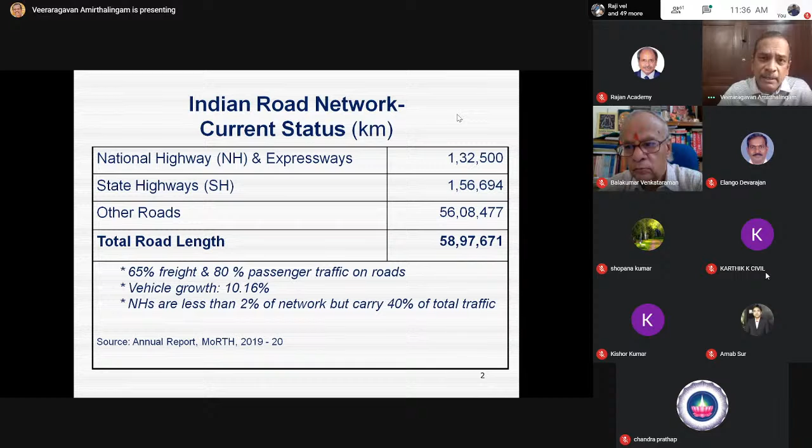The question I am posing before you is that, can I give you a better design which lasts longer? Can I use alternate materials, alternate technologies? Yes, that is possible. I will take you over what are the alternatives that are available for the design as well as rehabilitation of the pavement.

The first challenge that we face in India today is that we don't get aggregates for construction. Perhaps in South India we are fortunate enough. I would not consider Kerala to be very fortunate. There are issues of non-availability of materials for construction because of environmental and other issues. But as far as states like Karnataka, Tamil Nadu, Telangana, Andhra Pradesh, the problem is not that severe.

But if you go north, either to Uttarakhand and beyond, or to Bengal, or to the Northeast, you don't have good quality aggregates. So you don't have the luxury of designing the pavement as you wish.

So when the material is not available, what should I do now? Remember, we are not talking about the initial construction. We are talking about the future maintenance, future rehabilitation.

So should I consider a design which lasts longer with a costly structure, or an alternate design which will last only 10 to 15 years? What should I do now?

Now, if you look at the initial cost and design the pavement, it's quite possible that your vision is only 15 years, 20 years. But the concessional period for any road builder may be 25 years, 30 years. So he has to maintain the road for 30 years.

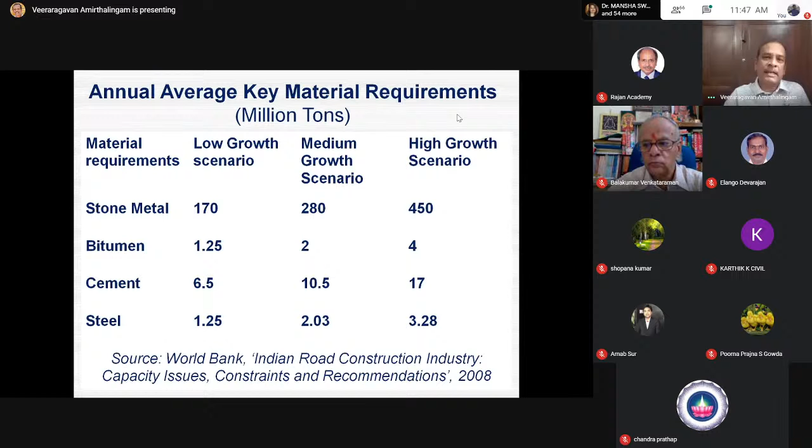So there comes the challenge of alternate designs. If you look at the conventional procedure we adopt to design a pavement, the pavement consists of different layers, starting from an embankment, a subgrade, subbase, base course, and the bituminous layer. So every layer is important, every layer has got a different function. The subgrade is one layer that supports the entire pavement system.

I always tell that there are people who work on bitumen, people who work on bituminous mix, people who work on granular material. So we look at the pavement as a material science. They say that if you test the bitumen, the pavement will perform better, or test a mix and the pavement will perform better. I always tell it is a system.

Even if you put a steel plate on a clayey soil, it will not work. Therefore, testing the bitumen, you say this bitumen is better than that bitumen - I don't question that. But don't tell about the pavement system by testing the material alone.

I always tell those people who do research on bitumen and bituminous mixes - you are not in the applied mechanics department, you are not in the chemistry department, you are not in the chemical engineering department. You are in a civil engineering department. A civil engineer should look at the pavement as a system, pavement as a structure.

We think that structure only means a slab and beams or similar structures, but pavement is also a structure. It has a number of layers, and each layer has a different function. The only thing is we are not worried about cracking on the pavement because the crack is below our feet. But if the crack is at the top, we are worried, because it may fall on our head. That's why we are more careful when it is a structure at the top. But the cost implications of a failure of a road will run to several million crores of rupees every year.

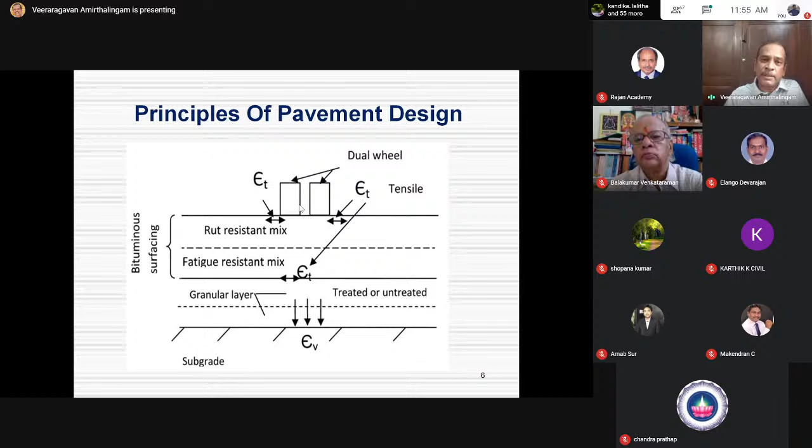What IRC has done is consider these design parameters of radial tensile strain, keeping it within the allowable limit, and the vertical compressive strain on top of subgrade as the allowable limit. They have come out with a design catalog, considering a granular subbase, a granular base, and a bituminous layer, putting only a bituminous layer in one basket.

Just now I told this bituminous layer is not one layer, it is two layers. In fact, it can be three layers: binder course and wearing course. I can say lower binder course, upper binder course. Both are different, gradations are different, binder contents are different. Similarly, the wearing course has a different gradation, different binder content.

So you can have a conventional subgrade, conventional granular subbase, conventional base course, a binder course, and a wearing course. This is option 1 before you.

I can have option 2, an alternate design, with a cement treated subbase here, and a cement treated base here. If I do this, I know pretty well that when I have a cement treated base, this cemented base will crack. At the time of design itself, I should know that this layer will crack.

But if you provide a thin bituminous layer, because I have a stabilized subbase and a stabilized base, the thickness of these layers will be much, much lower than what I have in option 1. So I have now reduced the thickness by stabilizing the subbase and stabilizing the base as well.

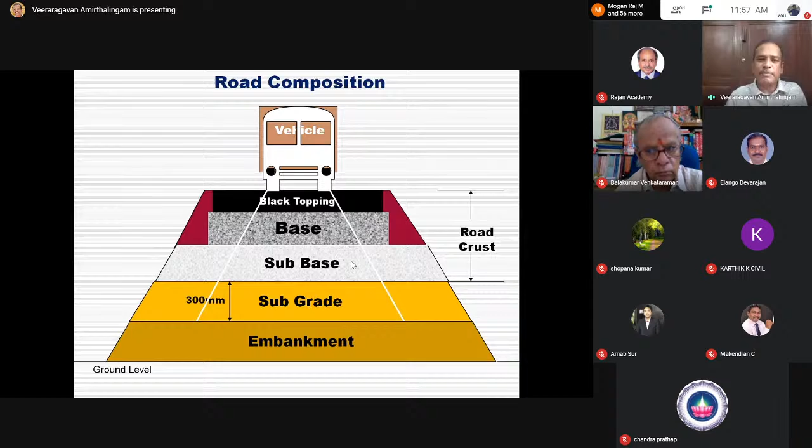Now you can ask me a question. You told about the cement treated subbase. Will it be permeable? Consider both points I said just now: the stresses coming at the bottom layers are much lower, so I don't require a higher percentage or dosage of cement. So when you have less than 2% cement, we found the cement treated subbase is also equally permeable. So that question is addressed.

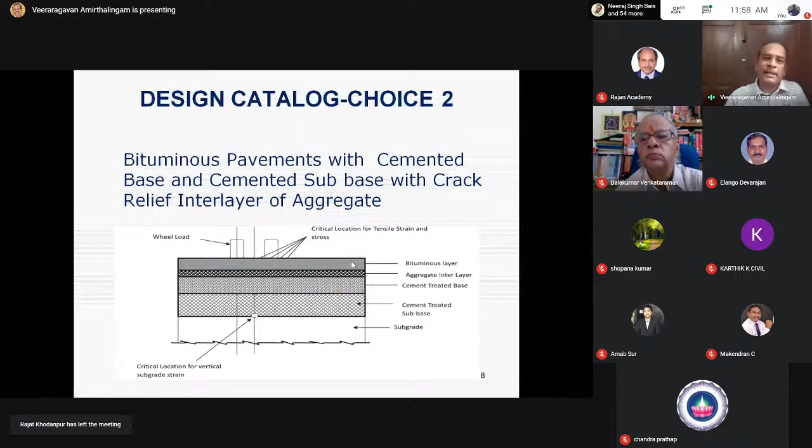Strength is better, with the result the thickness can be brought down. So in the case of structure 3, I have a subgrade, a cement treated subbase, and a cement treated base. In lieu of the granular layer, I go in for a SAMI layer, a stress-absorbing membrane interlayer, which can be a bitumen-impregnated geosynthetic layer.

All are crack retarding layers, I don't say crack prevention layers, crack retarding layers. They will prevent the crack from the cemented base from propagating to the bituminous layer. What will happen is that it's a continuously bonded material. With repeated application of load, there will be tension at the bottom, so a crack will form. If you don't take care, this crack will propagate and come to the top of the bituminous layer.

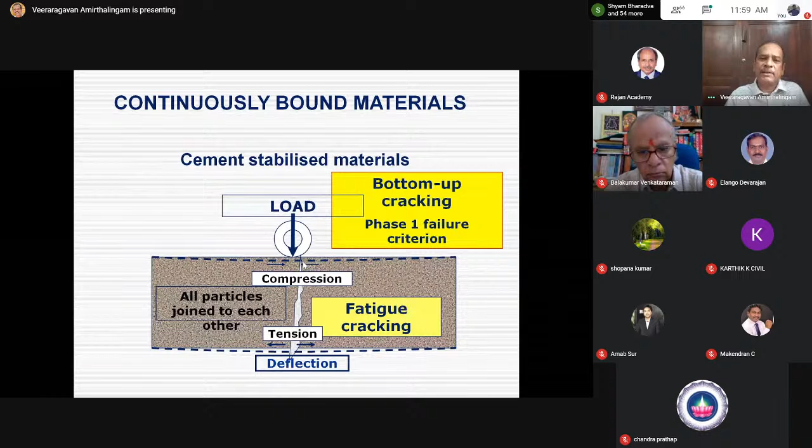But this crack is phase 1. It will become more cracks under repeated loads, that is the effective fatigue phase. Eventually in phase 3, the layer will totally crack, and the modulus of the layer will be equal to a granular layer. Now I have assumed 5000 MPa as a modulus.

It has cracked, it has come to 3000 MPa. It has cracked, it has come to 2000 MPa. It has cracked, it has come to 1000 MPa. Now I designed a pavement assuming 5000 MPa. Is it right? No. Then what modulus should I consider? Should I consider 1000? Maybe that was worthwhile.

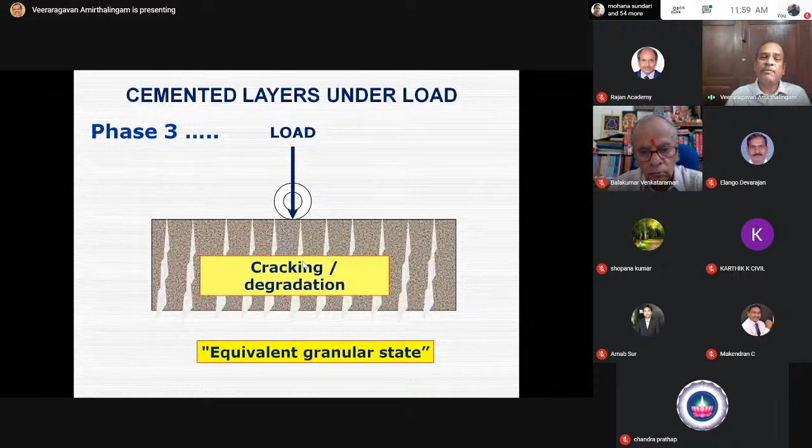So these are issues or research areas on which somebody can work: how do you account for this varying modulus value, and what is its influence on the performance prediction of these pavements? So what South Africa did was recognize that this crack will propagate, so they provided a crushed stone base, which will serve as a cushioning layer between the bituminous layer and the stabilized base.

This will retard the appearance of cracks. It's a crack prevention layer which can be adopted. That is why IRC has come out with a granular layer above a stabilized base. You can also go in for a SAMI layer.

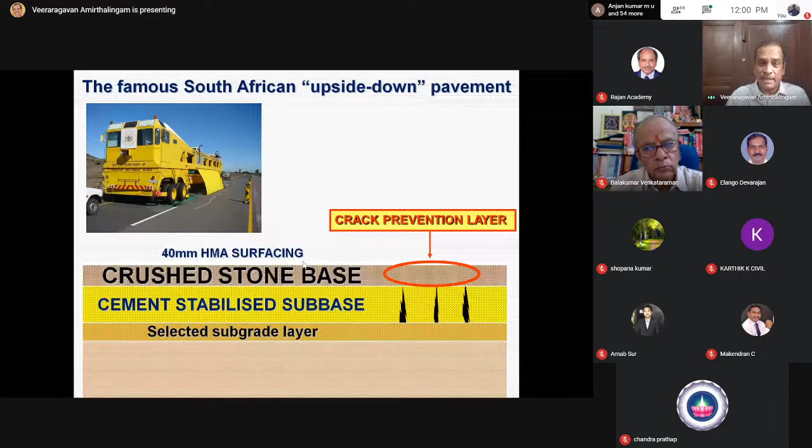They came out with catalog 4, which can be a foamed bitumen emulsion treated with old milled material. For example, you have a 2-lane road, 20 years old, 15 years old. Now I can provide an overlay above that and design it. But what will be the life of that overlay? Will it depend upon the lower layers and their strength? Yes, supposing the lower layer has got few layers of waterbound macadam and does not have a drainage layer.

What is to be done? In such cases, when aggregates are not available, you can mill the entire material, mill the whole bituminous layer. For example, if you look at Anna Salai, the thickness of the bituminous layer will be more than 30 to 40 centimeters. There is no meaning in providing a thicker overlay above that.

I have to resort to recycling. That's called reclaimed asphalt pavement material, called RAP. In some cases, you can mill the old bituminous layer with the old granular base and mix them with foam bitumen. To hot bitumen, you inject air and water. The volume of bitumen will expand maybe 10 to 15 times. It will spot weld the milled particles, and that can be used as a good base course.

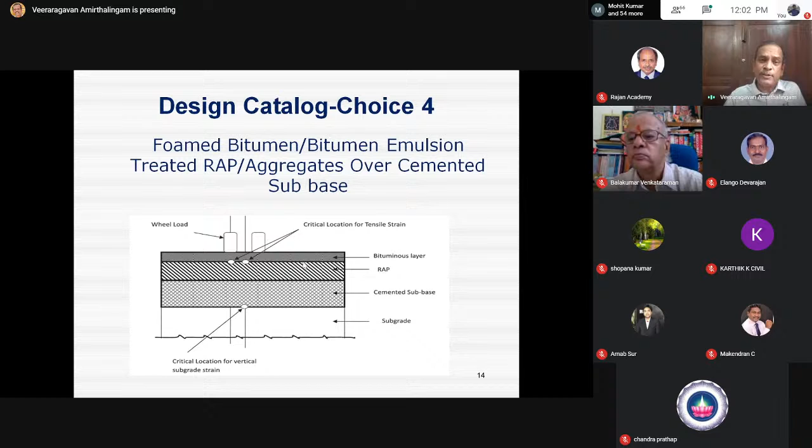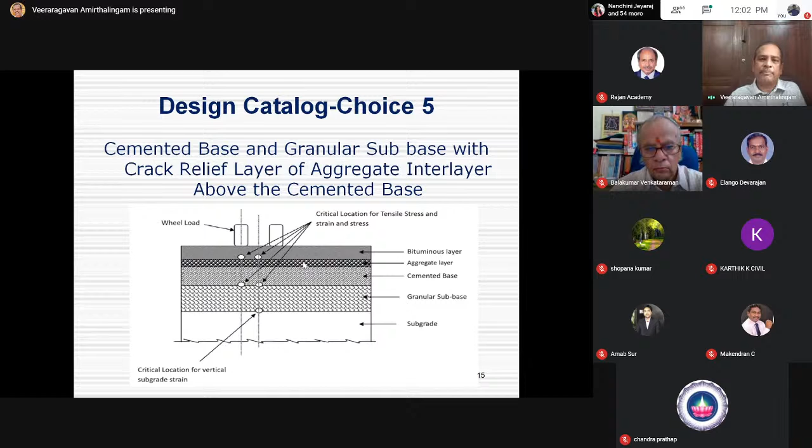So another option, alternate design, is using RAP. Option 5 can be above the cemented base, below that you can have a granular subbase. Instead of having cement treated subbase, you can have a cemented base, an aggregate layer, and a bituminous layer. You can also go in for a choice of a cemented subbase and a wet mix macadam.

So the bottom line is that in pavement design, there is nothing like a single design, nothing like a one-size-fits-all design. You may have to consider soil availability, aggregate availability, machinery availability, capability of the contractor, and then design alternate pavement sections. Then you should be able to predict how each of these will perform and select the one that will have the lowest life cycle cost.

So IRC has given a fatigue model, there are two fatigue models, one for highways with 90% reliability, other for low volume roads with 80% reliability. So they give resilient modulus. This is what I contested at the beginning. These resilient moduli are based on laboratory models, with midpoint gradation, optimum binder content at exactly 35 degrees, tested and then a model derived.

But in the field, pavements are subjected to different loads at different temperatures, different density, different compaction. The performance is different. So this fatigue model may not truly represent the field performance, but still for design purposes, you can use this fatigue model.

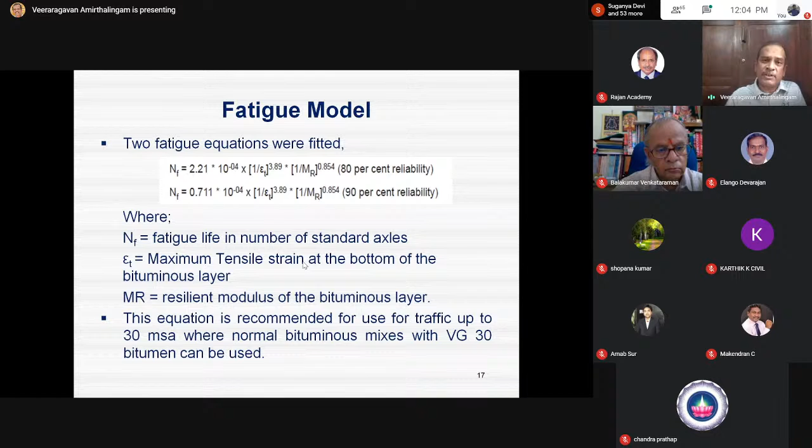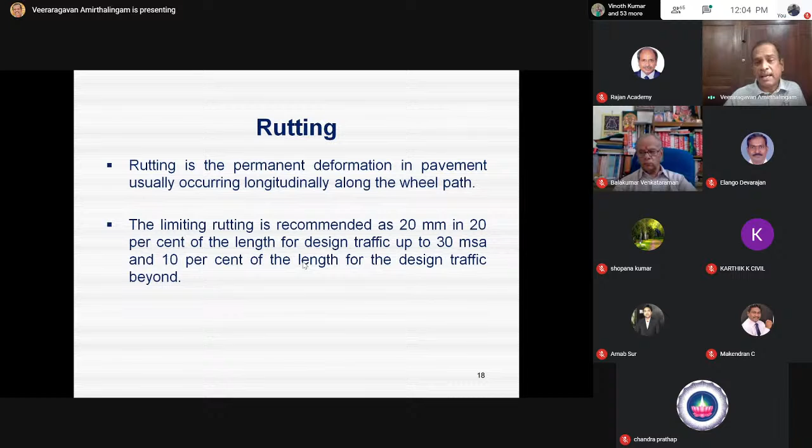Similarly, IRC has come out with a rutting model. It says 20 millimeter as the allowable rutting up to 30 MSA, and 20% of the length of the section can have this much rutting. Again, they have given a rutting model as per IRC 37 2018, with two equations, one with a higher reliability, other with a lower reliability. They consider rutting in this equation.

You can find the number of repetitions is related to the vertical compressive strain on top of the subgrade. It also says rutting in the bituminous layer also occurs due to secondary compaction and shear deformation, apart from that of the subgrade. So you have 20 millimeter rutting - what is the contribution of the bituminous mix, what is the contribution of the subgrade? This is something one has to study. Whoever wants to do research has to separate it out.

But the majority of the rutting that I have observed on Indian highways is due to secondary compaction problems with the bituminous mix. If the gradation is wrong, binder content is wrong, or binder type is wrong, how do you account for it? That is another million dollar question. So if I use a modified binder, will it perform? It may perform, but again we need a different fatigue model.

So there is cracking, there are rutting models. We can go in for cementitious subbase and base courses.

You should know cementitious material normally cracks due to shrinkage, maybe due to temperature changes. So we have to find that the elastic modulus for the design is much, much lower than the respective laboratory values.

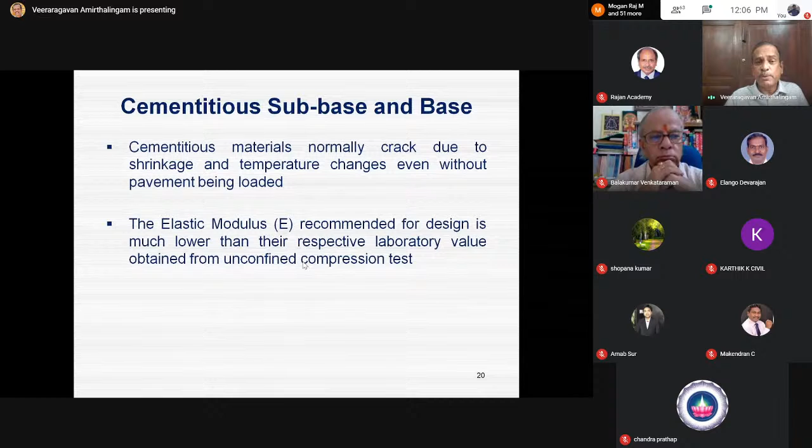So the IRC has again given a fatigue equation. It considers the elastic modulus of cementitious material. It also considers the reliability factor, 1 for expressways, 2 for other highways.

Epsilon T is the tensile strain in the cementitious layer in microstrains, which means you should also know to test a beam of cementitious base in the laboratory to find out at what strain value it fails.

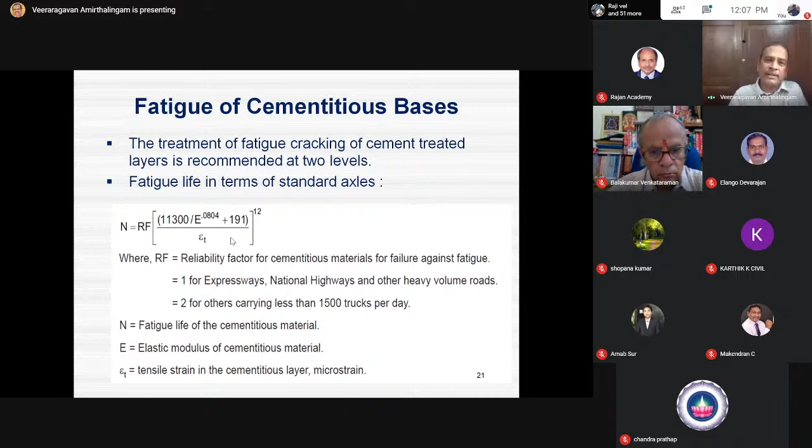But always remember at the back of your mind, field compaction and field density are different from laboratory density. So will I be able to get the same strength? That is a million dollar question. So a performance shift factor between the laboratory predicted value and the field value should always be considered.

They also give a fatigue equation, considering a cumulative fatigue damage analysis, which means you should consider the fatigue life in terms of cumulative number of axle loads. This means, again, I need the spectrum of axle loads.

What percentage of vehicles, trucks are overloaded? More and more the overloading, lesser and lesser will be the life.

So therefore, in the case of a cementitious base, you should consider the cumulative fatigue damage using the equations given by the IRC. You have to consider the fatigue life of the cementitious base and the fatigue life of the bituminous layer when you consider the performance of the pavement.

Now that is one side of the story. For bituminous pavement, there are different alternate designs possible. Now let's jump over to the concrete pavement.

We say concrete pavement. What is the concrete pavement which I am talking about? This concrete pavement can be a jointed cement concrete pavement, a continuously reinforced concrete pavement or CRCP, or a fiber reinforced concrete pavement, FRCP.

It can be a roller compacted concrete pavement. It can also be an interlocking concrete pavement block. Anything is possible, which again means if somebody asks you to design a concrete pavement, you have to ask back the question: what concrete pavement are you talking about?

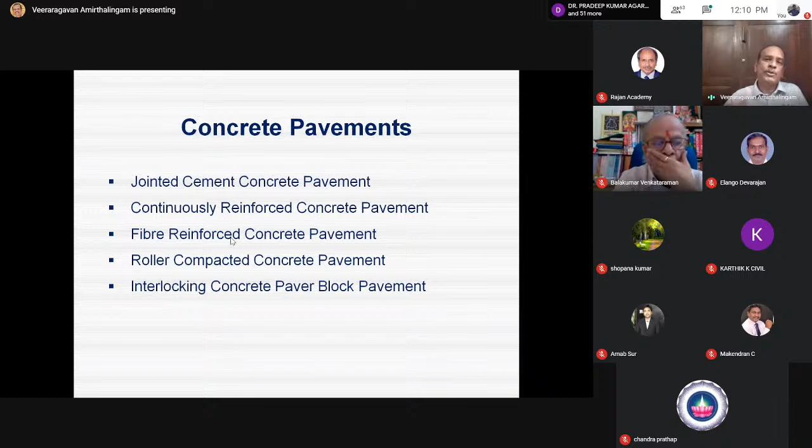There may be issues in constructing a roller compacted concrete pavement for highways, because riding quality will be an issue. But will it be sustainable? Yes, most probably yes. So depending upon the type of highway, category of the road, subgrade soil type, material availability, traffic, climate, and other factors, you have to choose the appropriate type of pavement.

In the case of jointed plain concrete pavement, we have dowel bars, we have tie bars. Normally we have a slab—there's nothing like a fixed rule, but normally one lane of 3.5 meters is one lane. We cut the slabs at maybe 4.2 to 4.5 meters. Wherever you have a contraction joint, we provide a dowel bar. At the end of the day's work, we have a full depth joint.

So assuming that we want a concrete pavement, it will warrant a grade of not less than M40 for highways. Even for rural roads, M30 grade of concrete is required.

And the thickness of the concrete pavement can vary—I forgot, there's also white topping. White topping is concrete over a bituminous pavement, or on a worn bituminous pavement. But in the case of a concrete pavement of M40 for a highway, the thickness requirement will be above 30 centimeters: 300 millimeters, 330, 350, 360.

Can I reduce edge load stresses? Yes, it's possible. How do you reduce them? The edge load stresses cause more distress, or more severe distress. I can go in for a wider shoulder, a concrete shoulder. If I extend the width of the pavement from 3.5 meters by half a meter either side, or one meter either side, then the edge load stresses are reduced, with the result that thickness can be reduced.

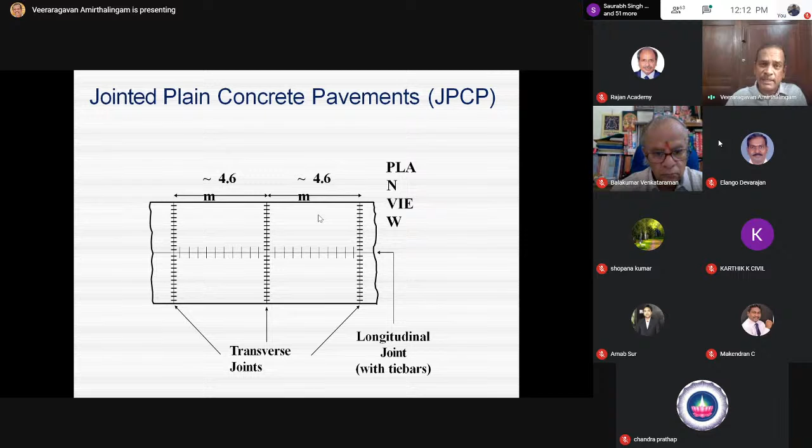We can also go for jointed reinforced concrete pavement, with a skin reinforcement using welded wire fabric, mainly to take care of thermal cracks, nothing more than that. It does not add strength, it adds nothing other than reducing thermal cracks. But generally, we don't go in for this reinforced concrete pavement.

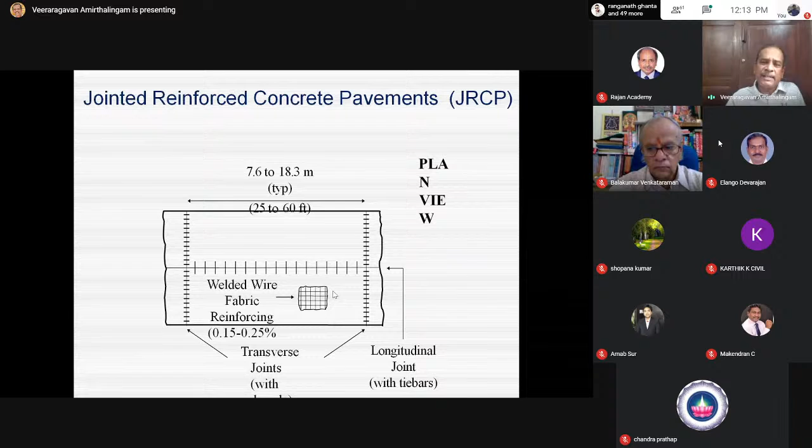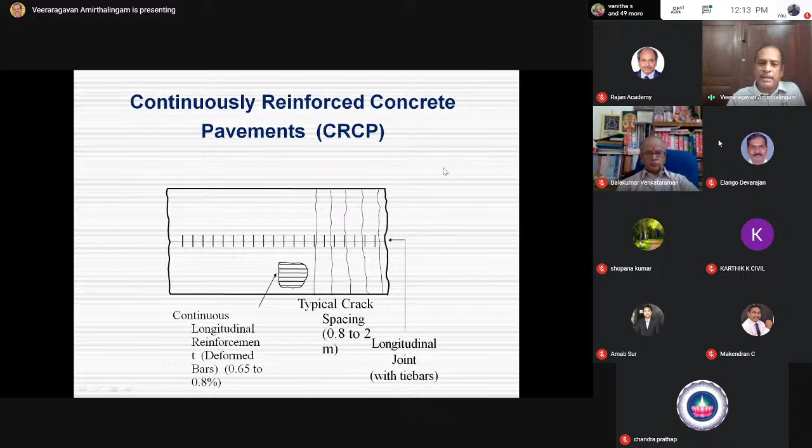JRCP is not commonly done. Either we go for jointed plain concrete pavement, or continuously reinforced concrete pavement. In continuously reinforced concrete pavement, there will be no regular joints, but typical minor hairline cracks may occur at 0.8 to 2 meter intervals. Tie bars are again required. This is how the reinforcement is for a continuously reinforced concrete pavement.

The advantage is no joints. Joints are the bottlenecks, the problematic locations in a concrete pavement. More the joints, more the problems, more noise, more discomfort. If you want a smoother, quieter concrete pavement, go for the CRCP.

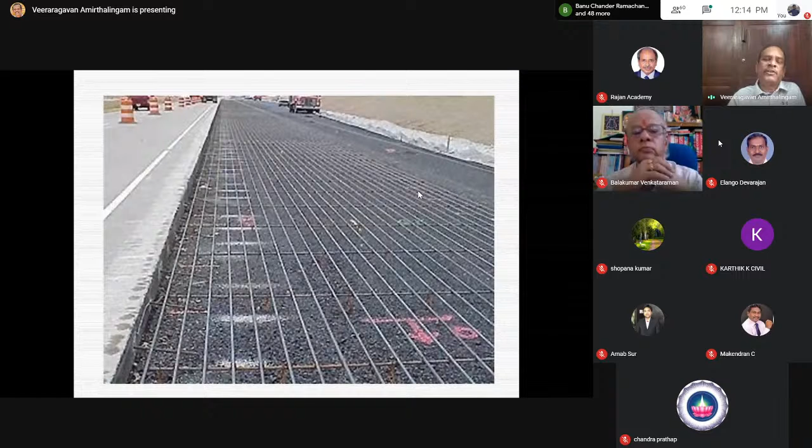But reinforcement is an issue - you have to consider it and design for it. You can definitely guarantee satisfactory performance in jointed reinforced concrete pavement - it's possible. The issue is whether the pavement will last for 30 years. It may or may not.

Why may not be? Because distresses can be material related - cracks mainly related to material durability issues. There can be structural distresses - if you have not provided joints at every 4.2 or 4.5 meters, then the crack will form exactly at that spacing anyway.

These joints should be cut to one-third the depth using diamond cutters between the first and second day. If you delay it, the cracks will form randomly. That's another issue. Third is related to construction and foundation support.

If the foundation is not uniform, there will be settlements. Once the concrete settles, it is very difficult to jack up the slabs, grout them, and put them back in exactly the same profile. So that can be a problem. Concrete, even a steel plate, may not last unless you take care of the supporting layers. So distresses can be material related, structural design related, or support condition related.

In a nutshell, whether it's a bituminous pavement or a concrete pavement, it is a system as a whole. Don't treat mix design as just one component, or structural material as one component, or design as another - they are not independent. You have to marry all of these for the system to perform. Don't test the binder and then predict the performance of the system as a whole. Don't test the mix and then claim to know the performance of the whole system.

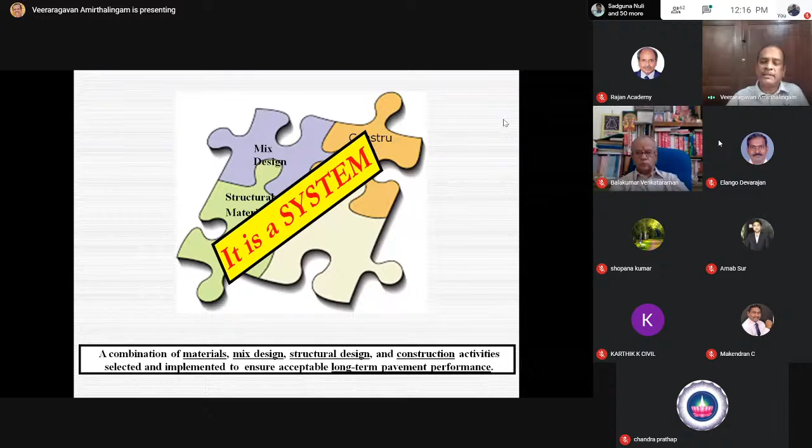I think it's time we also look at precast concrete pavement - something new. I always say tonight there should not be a road, and tomorrow morning there should be a concrete pavement. Is that possible? I think we are moving in this direction - towards precast concrete pavement, which can ensure satisfactory design, good quality control, and curing, and then you bring it to site and assemble it. When we can transport bridge decks, why not transport precast concrete pavements?

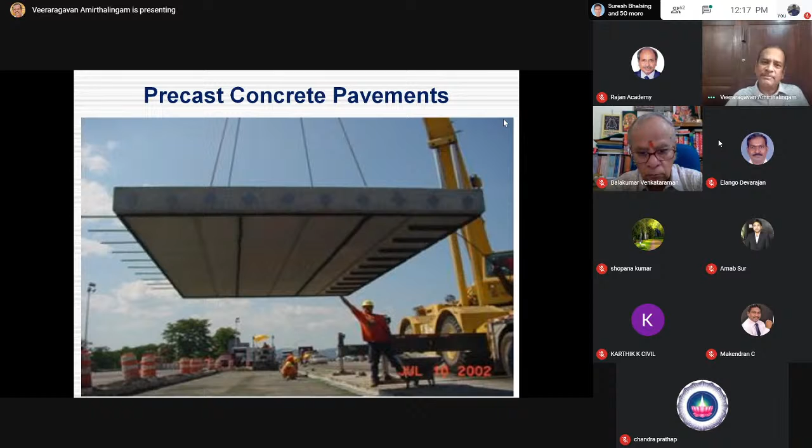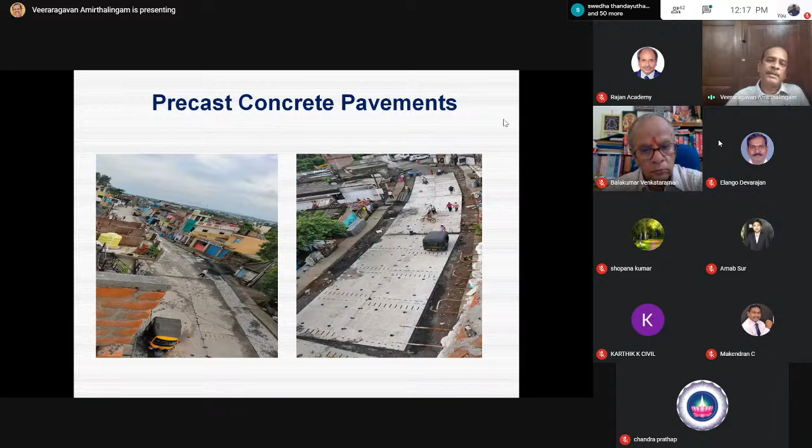The future is alternate design. From the conventional jointed plain cement concrete pavement, we will move over to precast concrete pavement. Alternate pavement types depend on it being bituminous, composite, or concrete. We have to consider alternate rehabilitation techniques, consider life cycle cost, and also consider sustainability issues in construction.

Now projects are being tendered in different formats. Earlier we were doing bill of quantities - the BOQ, bill of quantities, worked out, then we'd tender the project. Then the contractor used to blame the designer - your design is wrong - and we used to blame the contractor - your quality is bad. That was going on earlier. Then we got into the EPC contract: engineering, procurement, and construction, where the contractor can design on his own.

So we got into the design, build, operate, transfer basis - you investigate, you construct, and you operate. So you cannot blame me that my design is wrong. In case of new construction, for all NHAI projects, we have brought in DBOT - design, build, operate, and transfer. On the other hand, we have projects for existing roads where you have to maintain and operate - that is toll, operate, and transfer.

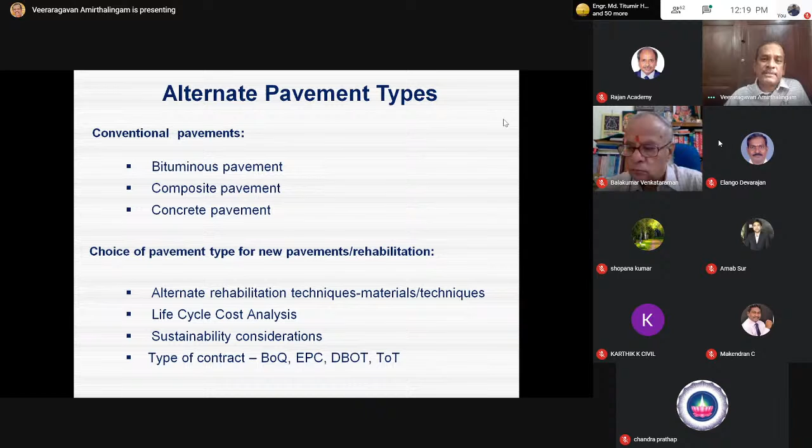Well, an already constructed road is available. You have to maintain and operate it for the next 15 years. So you have to value the road asset, estimate what alternate maintenance treatments are needed, and then design and construct the treatment - salvaging and saving the material, reducing the resources, and then constructing the pavement.

There are possibilities of having a higher modulus compared to conventional gravel. You can go in for a stabilized subbase, and also use modified binders which can withstand higher strains. Is it possible to reduce the strain values? Yes - these pavement design thicknesses will reduce significantly. Will there be a reduction in asphalt layer thickness? Yes. Will it result in pollution reduction? Yes. Will it result in cost saving? Yes. So we should move towards sustainable pavement materials and sustainable design through alternate designs.

You can also recycle materials - you can add up to 30% reclaimed asphalt pavement material, RAP, in a hot mix. You can have up to 50% RAP in cold mix. In the Chennai Tada section, 100% RAP has been used. It is possible to use the entire reclaimed material in pavement design and construction.

So the future of India, and not only India but around the world, is salvaging already constructed pavement, saving material, reducing aggregate consumption, and ensuring satisfactory performance. Even in the case of rural roads, which are often in awfully bad condition, this approach applies.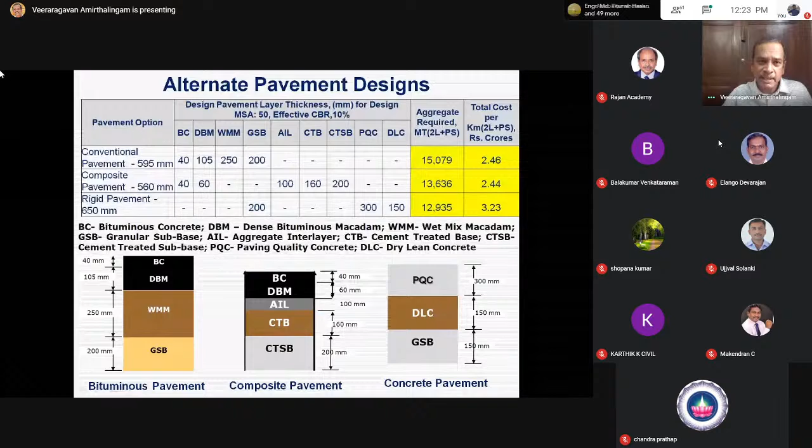If you have money, go for concrete. If you have less money, when you have to choose between conventional design and the composite, I would bet on composite pavement. Exactly this is what we are going to try in Karnataka for the Karnataka Road Development Corporation. I'll come to that issue. But you should consider alternate pavement designs.

Yes, I can further reduce. How do you do that? I will not have this 250 millimeter wet mix macadam, I'll reduce it to 150. How? I can use the geocell. 200 millimeter GSB required? No, I can bring down to 150. So I can further reduce the cost by stabilizing the subgrade using alternate materials. I think the future is on considering alternate materials.

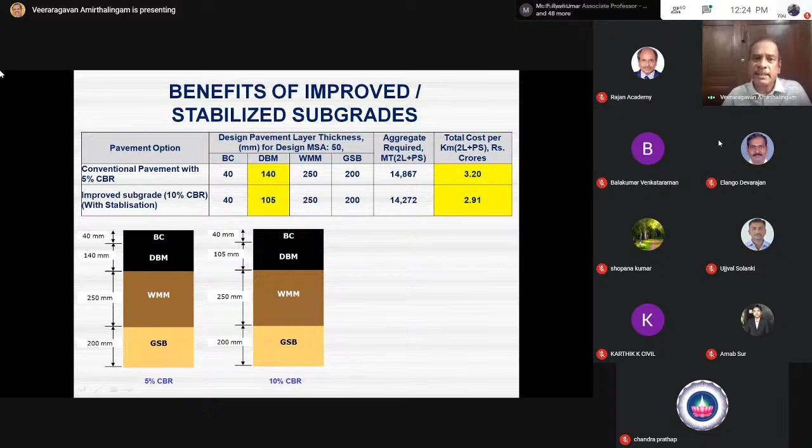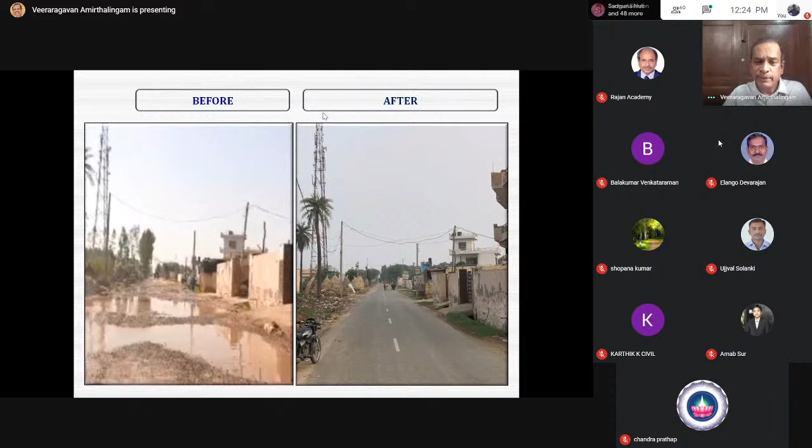This is a photograph of the road before, this is a photograph of the road after. So this road will last for the next 15 years for a rural road without any major maintenance. I think this is something that we should look for. I can use geocells in road pavements for construction. It's an extruded polymeric material like HDPE.

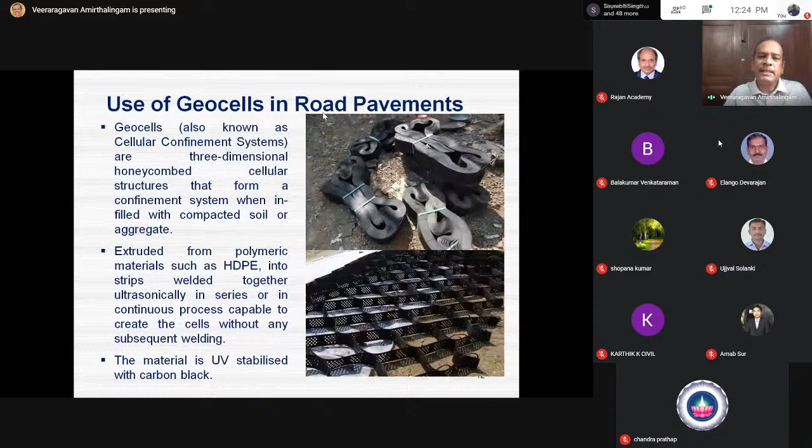This is work that we did at Maharashtra in a Govind dairy. Milk tankers with 12 tons, 12,000 liters will come. So when there are trucks of 10, 12 tons ply, the road was slushy. We suggested go for geocell - stretch the geocells, fill that with aggregates, compact.

What are the advantages? I can use the IRC conventional design, thickness required is 975. I use a geocell only in the subgrade, thickness reduction is possible to 735. Use a geocell in the base, I can reduce thickness to 520. Only the base course 865. So from 975, I can bring the thickness down to 520 by using a geocell. This lasts for 16 years, this lasts for 20 years. If this costs 2,635, this will cost 2,450.

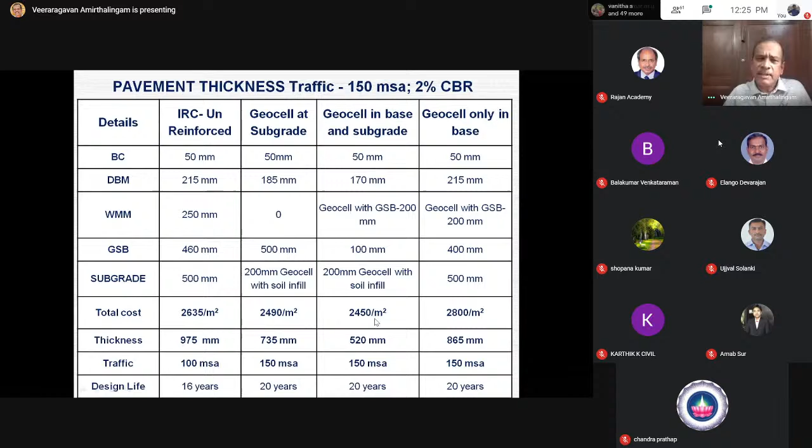Even in case of high CBR, instead of 650 millimeter pavement thickness, I can bring it down from 650 to 340 using a geocell, using it in both the base and subgrade. If this lasts for 14 years, this can last for 20 years. So the future is on use of alternate materials. Instead of stabilization, I can use even a geogrid. I can improve the strength and hence guarantee you the performance.

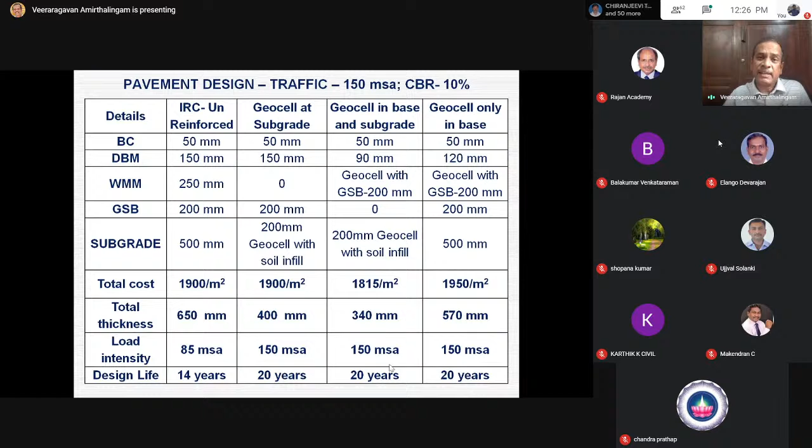Earlier, you can ask me, why were you not adopting all these years? We were not having a code of practice all these years, so we were not adopting. Now, IRC SP 59 is on the use of geotextiles and geosynthetics in highway pavements. You can use that, refer to it, and then design the pavement like this.

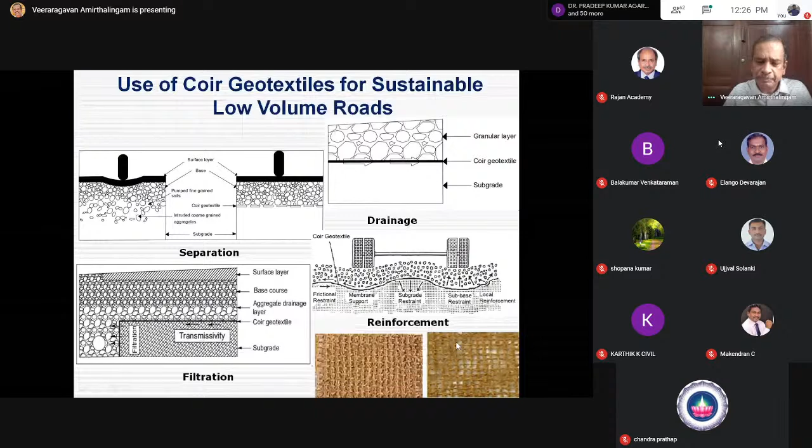Even coir can be used. We tried it for rural roads. Coir has got a function of separation, filtration, drainage, and reinforcement. There are two different types of coir available, different GSMs. For a rural road, we constructed with coir, and we found that if you use 700 GSM or 400 GSM, you can bring down the thicknesses, say from 175 plus 150 to 125 plus 150. So I can bring down the thickness by 50 millimeter here, and from 175 to 150 here. So it is possible to ensure sustainability in low volume roads using coir.

You can also use jute. Other applications are water erosion control using coir - grass will grow. You may ask me a question: will it not be biodegradable? Yes, they are biodegradable.

But we found after 6 to 7 years, they are not that much biodegraded, but they impart the strength in that process, with the result performance is good.

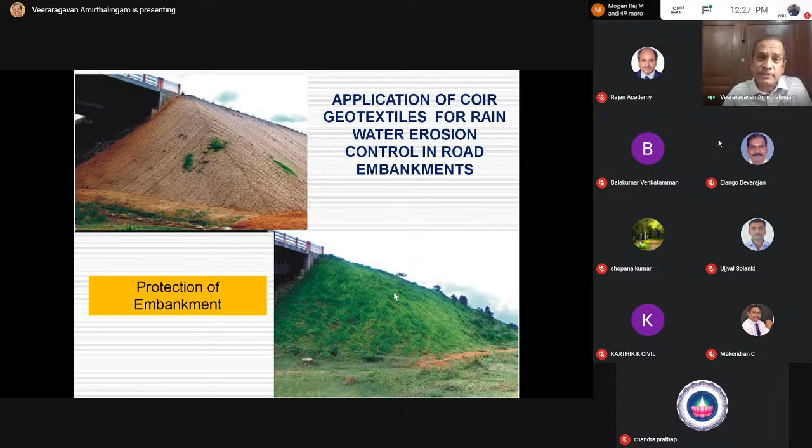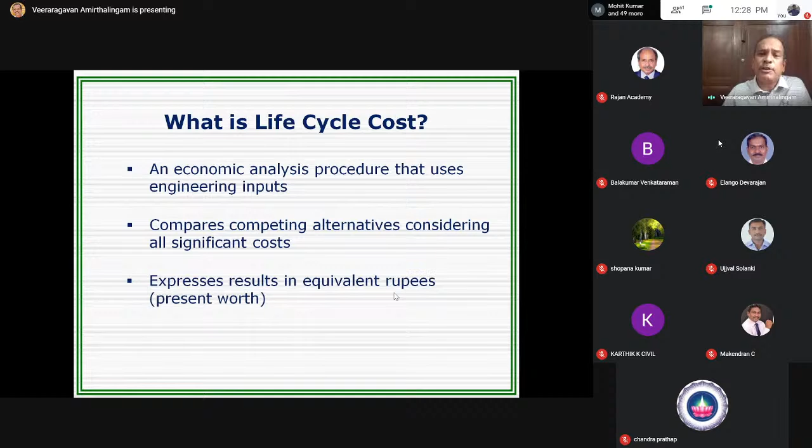Alternate designs - we should consider the alternate designs of life cycle economic analysis procedure. We compare alternate designs for the results in equivalent rupees. So you consider only the initial cost.

The current method of tendering is that if there are 10 bids received from 10 different contractors, whoever quotes lowest, L1, only will get the design, will get the project. But my question at this point is that maybe that another contractor who has quoted 20% more will not be a better design with improved performance?

Yes, that is also possible. But the current contract system does not encourage that. We need to bring in weightages, like green rating of buildings. We have to bring in green rating of highways, alternate technologies which are sustainable.

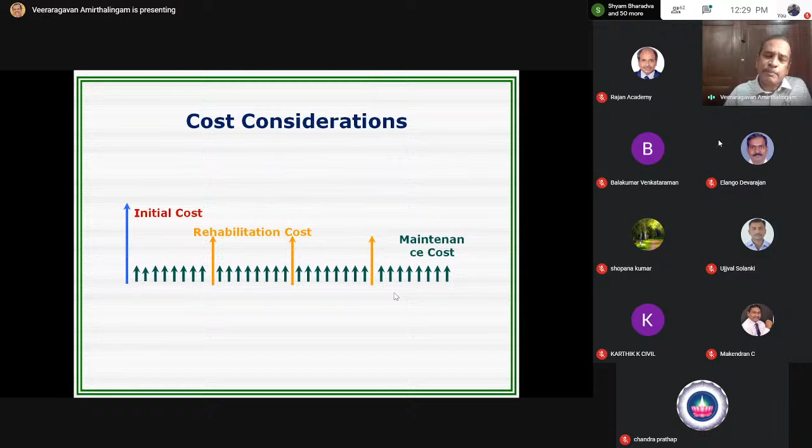But what about the initial construction? The pavement will warrant maintenance every year - that is the routine maintenance. Even though you do routine maintenance, due to wear and tear they require a minor rehabilitation, which can be a thin overlay or a thick overlay, depending upon the deterioration of the pavement.

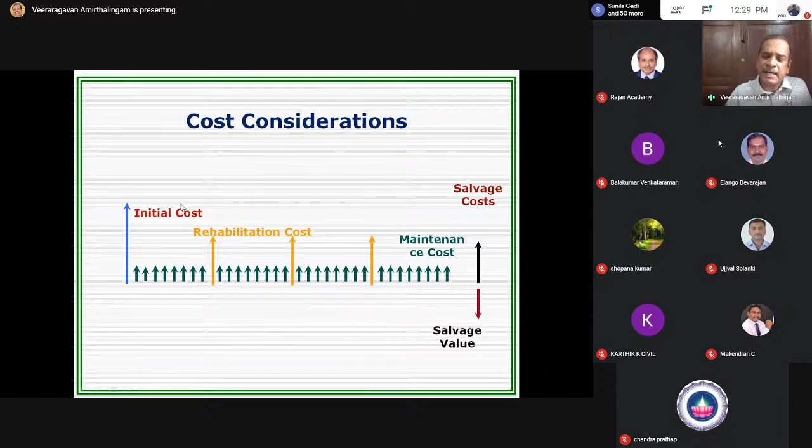There's always a salvage value at the end of the life. If you bring in different pavements of different design, they will perform differently. The year in which they need a rehabilitation treatment will change. So accordingly, you have to bring back the cost to a base year and compare - that is the present worth of cost. For example, you can find that the cost keeps increasing year after year depending upon the design.

I can have design A, which warrants maintenance in the 11th and 22nd year. Design B, which warrants maintenance in the 9th, 18th and 27th year. Design C warrants 8th, 15th, and 23rd. Design D, only one maintenance in the 14th year. Design E, 10th and 21st years. Now I have 5 alternate designs - which is better?

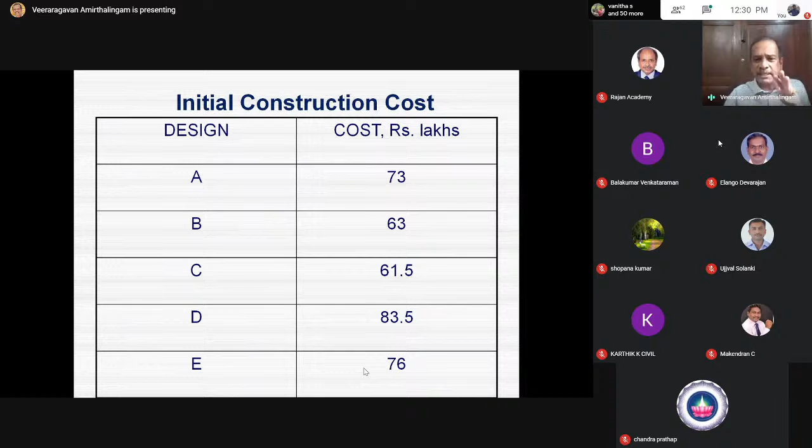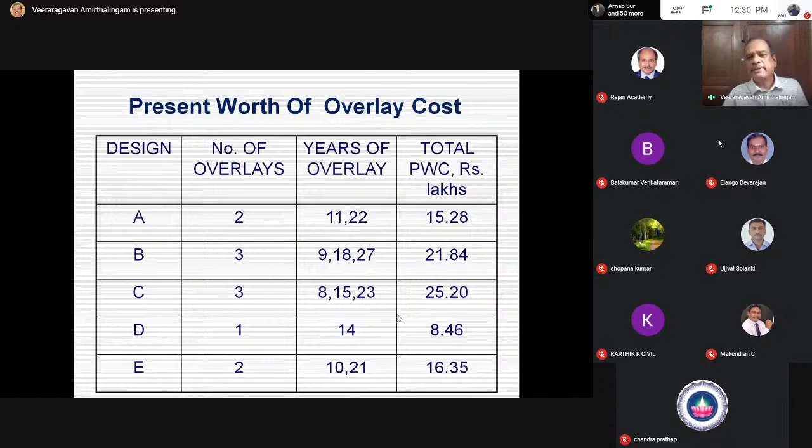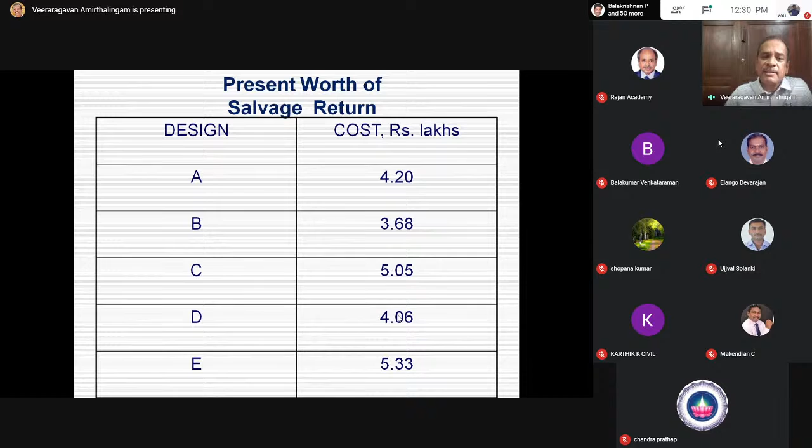This is the extra user cost due to speed reduction because of frequent maintenance. This is the present worth of salvage return. I put all of them in one basket and now compare the 5 alternate designs.

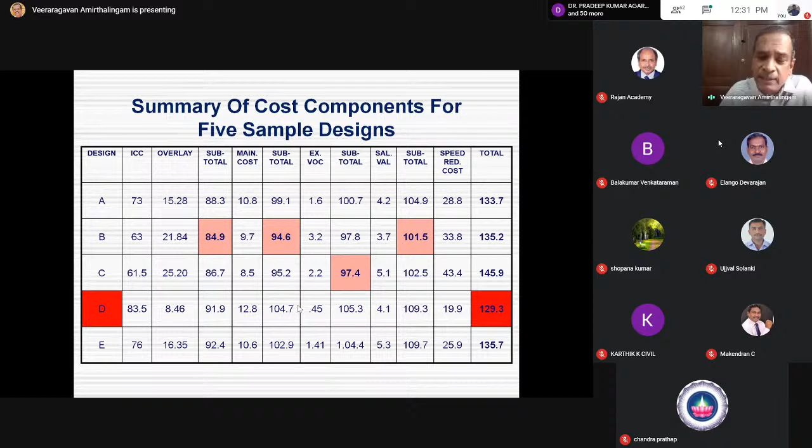You'll be surprised to know - even though the initial cost is more, 63 versus 83 - at the end of the life you'll find that the design which warrants only one maintenance is the sustainable, long-lasting, lowest life cycle cost design. I think this is the future of India, wherein you should consider alternate designs and come out with a cost-effective design.

Similarly, for rehabilitation, a pavement will warrant maintenance at different time periods. For example, maintenance can be preventive or corrective. There are different choices of treatment - fog seal, slurry seal, microsurfacing - as preventive maintenance, which can be done when the pavement is in good condition.

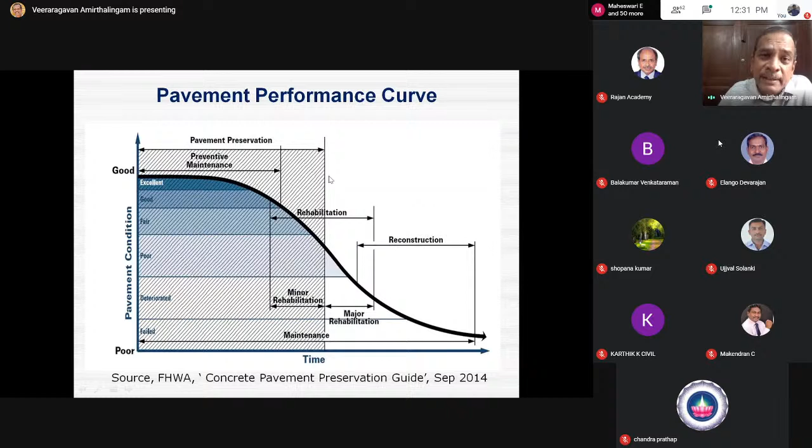If I do it here, the performance is better, like a new pavement. Why are you not doing that? This is something we need to develop - the concept of preventive maintenance with different alternatives.

Alternate binders are available, different mixes are available. Recycling, again, can be cold or hot, in situ or central plant. So alternate rehabilitation treatments are possible here.

For example, this is an existing cracked pavement. I can provide an overlay above with 140 millimeter dense bituminous macadam and bituminous concrete. Alternatively, I can mill the material - as I said, within Chennai-Tada, this is a bitumen stabilized material - so I use this material here and then provide BC.

You'll find that the cost per kilometer is 116 lakhs versus only 95 lakhs. Aggregate consumption is 3,400 tons per kilometer versus only 1,180 tons per kilometer. So an alternate design with recycling, reusing the material and rehabilitating it, will be much better than providing an overlay over an existing deteriorated road.

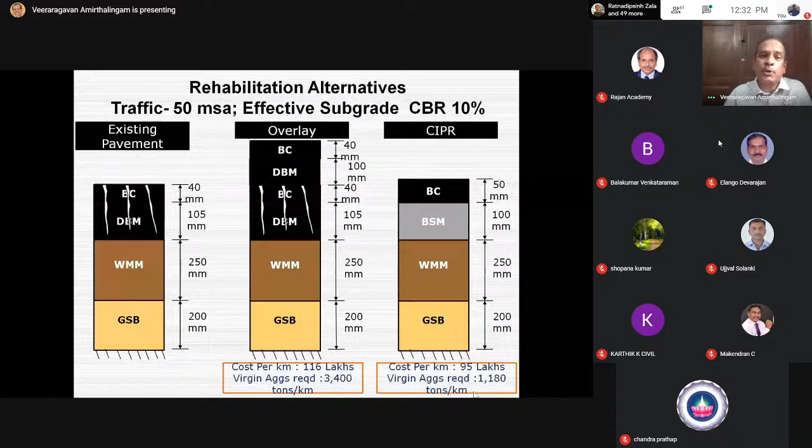A simple case of a conventional design with a cement treated subbase (CTSB) - you'll find that around 3,000 metric tons or 2,500 metric tons of aggregate can be saved by providing a cement treated subbase, also using reclaimed asphalt pavement materials.

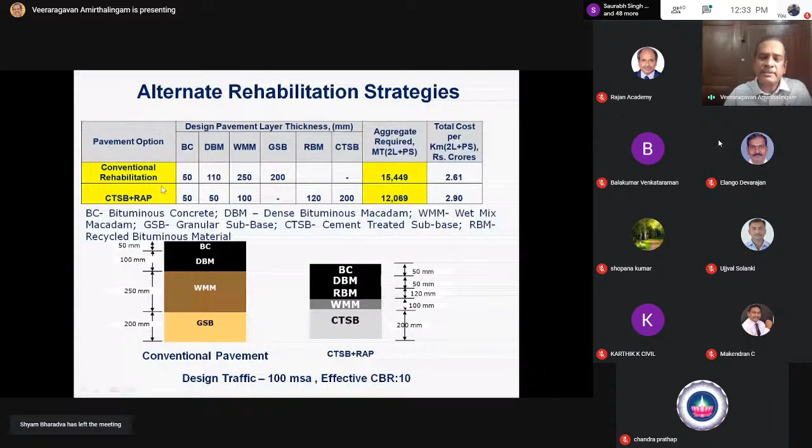So the future is on reduce, reuse, and recycle. That is the mantra. If you consider the cost economics of cement treated subbase material, we found that we can save nearly 60 lakh rupees for a 4-lane highway by introducing a cement treated subbase.

So in this case, for example, this is a road which has to be rehabilitated. What should I do now? You have got different options. This pavement has already cracked, as you are seeing here.

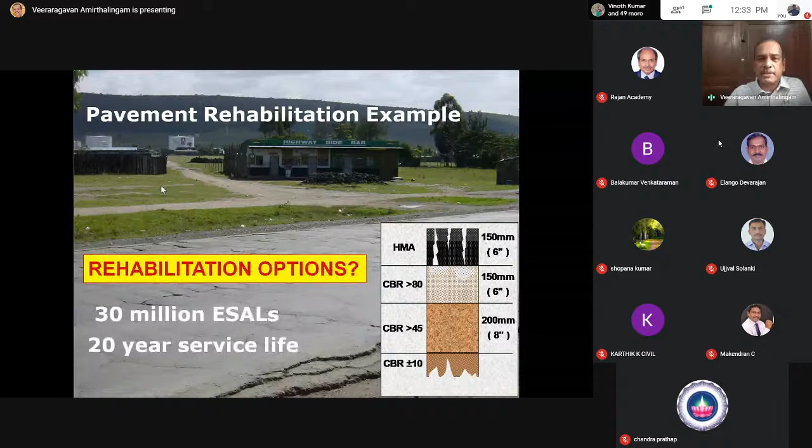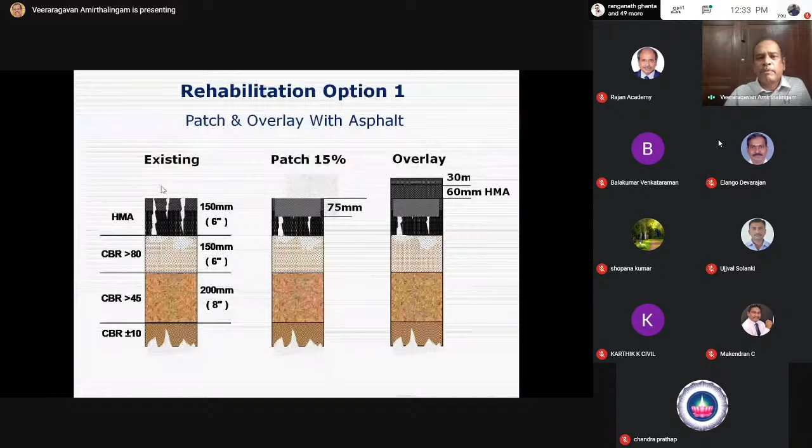What are the options? Option 1: I will try to patch. Mill only the top 75 millimeters and patch it. After that, I provide an overlay and 30 millimeter ultra thin friction coat for 30 million standard axles. Cost of this will be around $30 per square meter.

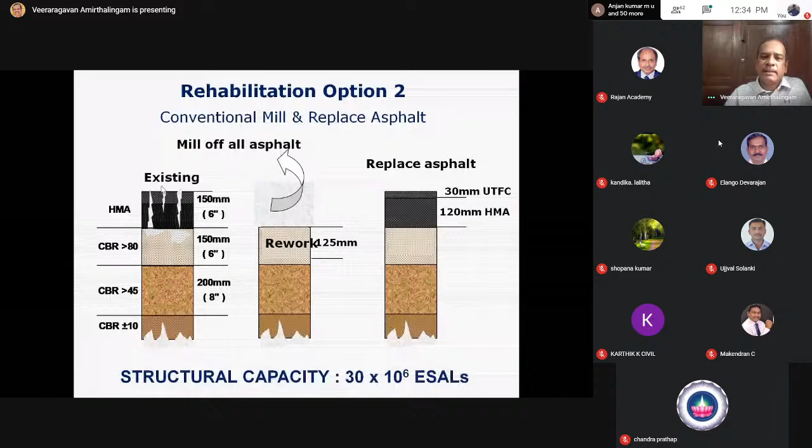Option 2: I'll mill the entire bituminous layer and then rework on the base course and provide a bituminous overlay. For this 30 MSA, the cost of this will be nearly $45 per square meter.

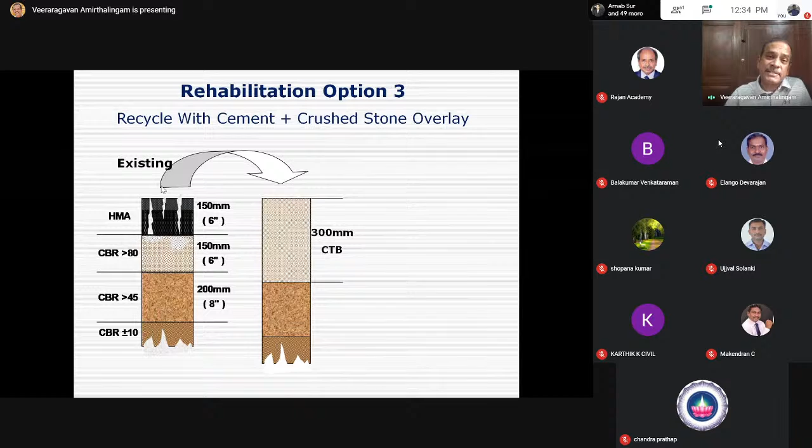Option 3: wherein I mill the whole bituminous and the granular base. I provide a cement treated base and a bituminous layer at the top after providing a granular layer of 150 millimeter. The cost of this will be $42 per square meter.

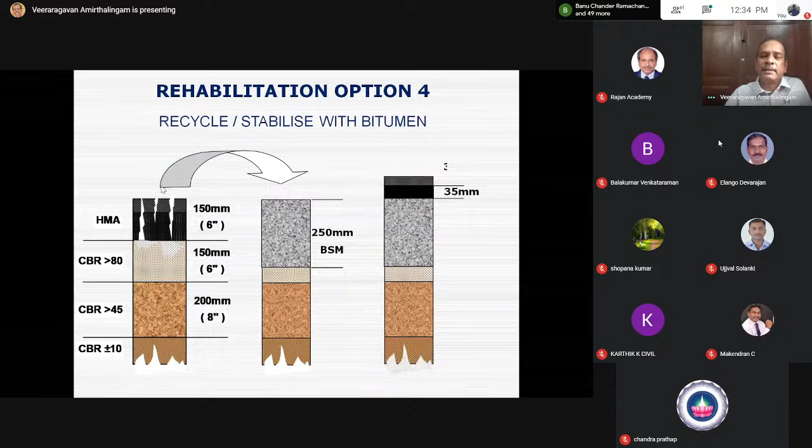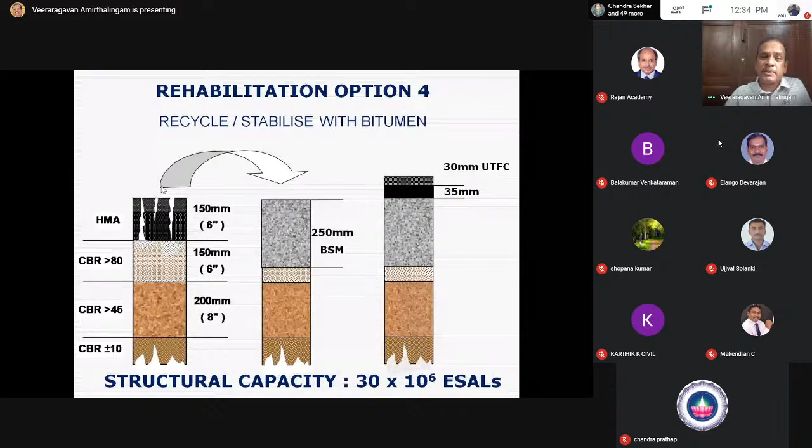Option 4, this is what Chennai did: mill the entire bituminous layer and the granular layer. It is a bitumen stabilized material. Over that, I don't require 75 millimeter bituminous layer, just 35 millimeter bituminous layer will be adequate. Maybe you can provide a 30 millimeter ultra thin friction course. Cost of this will be the lowest, $24.

So even while rehabilitating an existing road, you should consider alternate designs and then come out with the design. So in summary, the one with the lowest cost will be the one wherein you recycle, reduce, and reuse the materials.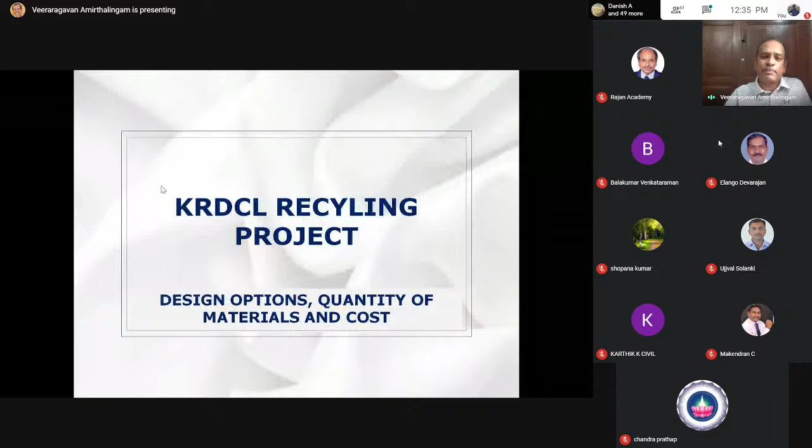This is a road of a KRDCL project, which I am currently working on, which has different alternate designs for 20 million standard axles. You can bring down the thickness, say for example, 200 plus 250 plus 130. I can bring the thickness down significantly by providing a cement treated subbase.

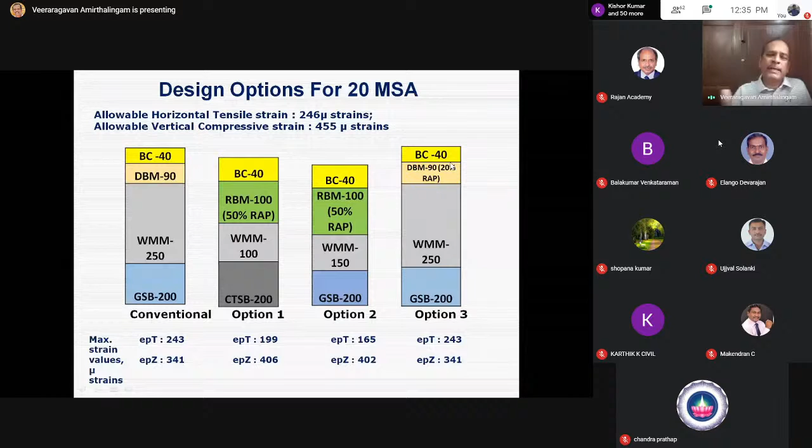I can have reclaimed bituminous material with 50% RAP. For the DBM, 30% or 20% RAP can be used. So we want to compare alternate designs and then study the performance. We find nearly about 40% savings is possible by adopting alternate designs.

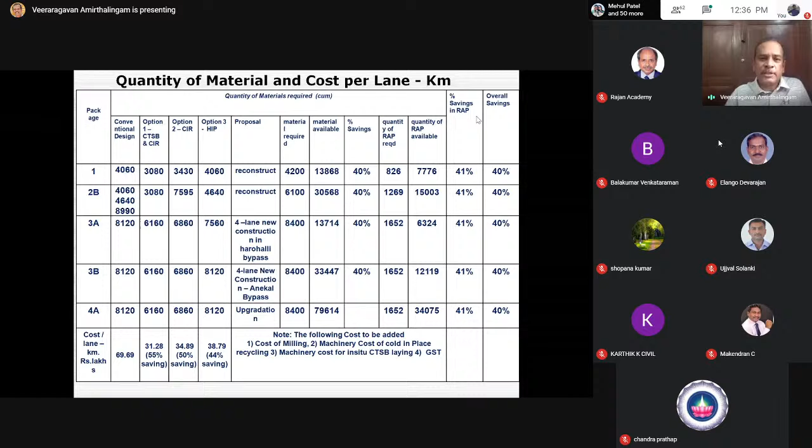So the future of India is in recycling of materials. To sum up the cost comparison of rehabilitation, 2 options for a 4-lane highway: mill and replace with full depth, mill, replace, and full depth as one layer of DBM and BC. I think the cost of this will be nearly 2 crore 83 lakhs.

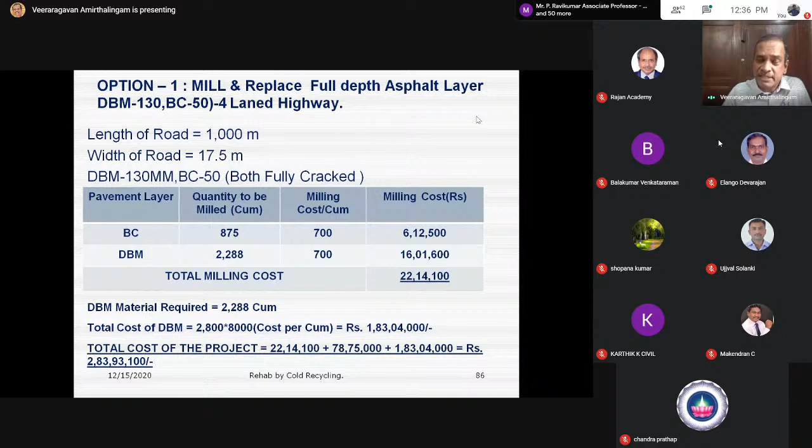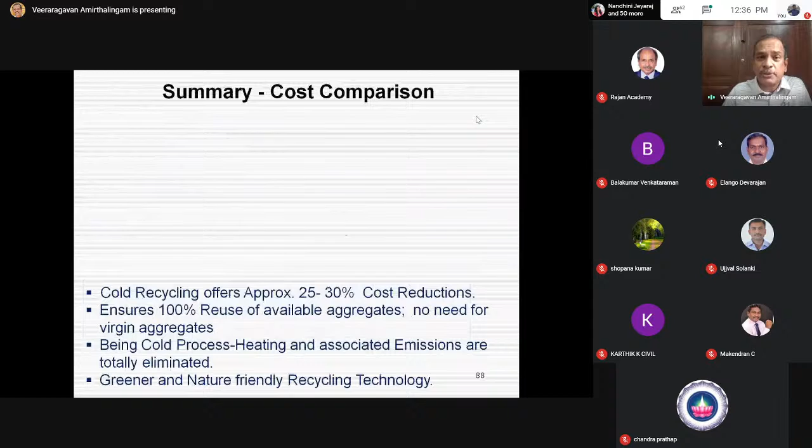Alternatively, I go in for cold in-place recycling with a foam bituminous mix. You'll find that the cost of this will be 2,11,000. We compare the cost of both options from 2,84,000 to 2,12,000. Nearly 71 lakhs you can save per kilometer by adopting recycling technology.

So cold recycling offers nearly 25 to 30% reduction in cost, ensures 100% reuse of the material. Being a cold process, no heating, so environmental pollution is not there. It's a greener and nature-friendly recycling technology that you should adopt.

So to conclude, the immediate need is to consider alternatives in new construction as well as in rehabilitation of the pavement. This will reduce, reuse, and recycle the material and will conserve the natural resources. Alternate designs will definitely ensure satisfactory or better performance.

The only challenge is predicting the performance of the pavement. Here comes the mechanistic empirical pavement prediction models, which can take care of alternate designs.

There's a need to change the contract conditions. You should not be based only on L1. You should give weightage for the savings in aggregate consumption, improved performance, and lower life cycle cost in the tender evaluation process. This involved benefit needs to be accounted for in the project evaluation.

Again, there is no one-size-fits-all design. Depending upon the subgrade soil, traffic, climate, environmental conditions, and constructability issues, you have to choose the appropriate design for the appropriate project. And that's what I want to convey at this point of time.

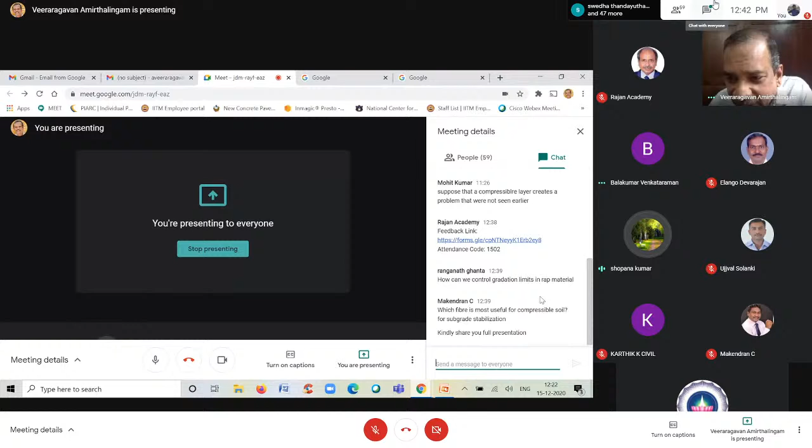Can you tell us how we can control the gradation limits in the RAP material? I don't think you can control anything. The thing is that you should take into account the various samples - sample in the sense, if you want to know finally what is the gradation of the RAP. The RAP gradation will vary depending upon the different layers that were constructed over a period of time. So what I would suggest is that sampling plays an important role. Depending upon a 60-kilometer road, I will say at least 20 core samples I will take. Then check the variation between the samples and within the samples. Then I fix the gradation.

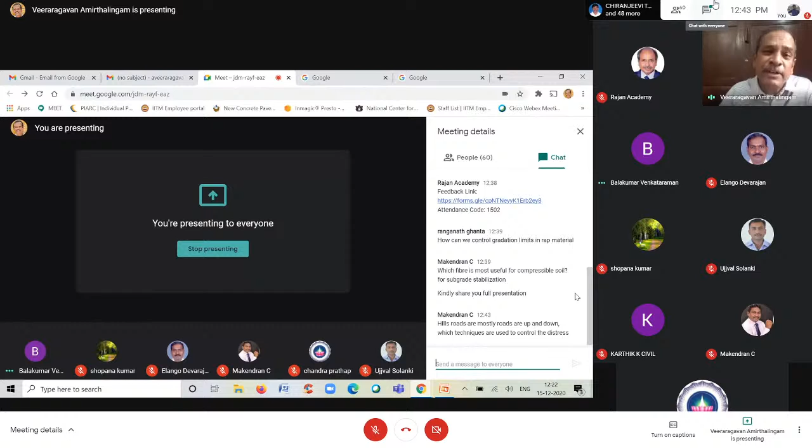So now IRC 120 will tell you the desired gradation. Once you know the gradation of the RAP, an average of all the samples, then you can fit into what gradation sample percentage you can adopt. There's nothing like you cannot control the gradation of the RAP. As it is, you have to consider it, and you can only decide the dosage of RAP that can be considered depending upon the gradation available.

Other case, which fiber is most useful for compressible soil for subgrade stabilization? Kindly share your full presentation. My presentation will be shared.

But I think the issue with fibers is how do you mix it at the site? How do you ensure homogeneity? These are the issues that come into picture. Therefore, I would prefer to go in for a geogrid rather than trying to mix fibers at the site. The aspect ratio of the fiber, the thickness of the fiber, the dosage of fiber, many things come into picture. Nobody will be able to answer which fiber is best suited.

Again, I repeat, there is nothing like a one-size-fits-all design. The design has to be made by you, but in the laboratory you can do it by hand, mixing it uniformly, all that you can do with 1 kg of soil.

But when you're constructing a 50 centimeter thick layer, 500 millimeter thick subgrade, for a formation width of 25 meters per kilometer, compute the quantity of material. How do you ensure uniformity in this? What benefit do you get by adding the fiber?

That is the question. Instead, I would try to do mixing with either cement or lime or any other stabilizer in a pug mill, ensure homogeneity of the mix, and construct. But I don't say the fibers will not work. Fibers may work, but that has to be verified by the laboratory. Laboratory trials will work, but the constructability issue is something you should address.

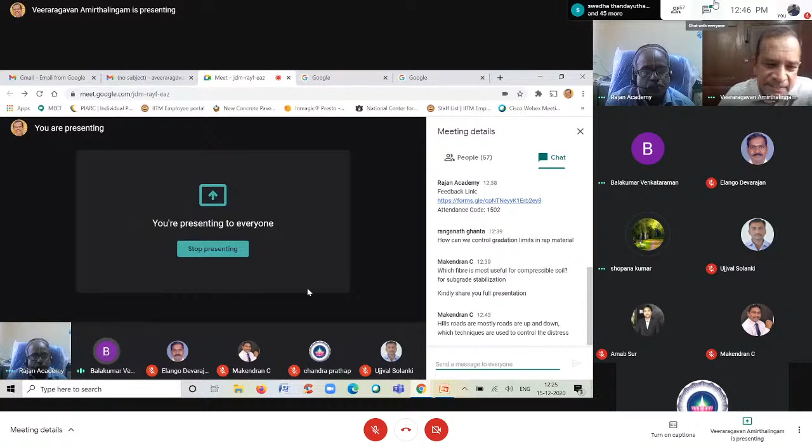Any other question? I think that's the question, it seems, sir. Yeah. Thank you, sir. Thank you very much, sir. Thank you very much. Yeah. Thanks a lot, sir.

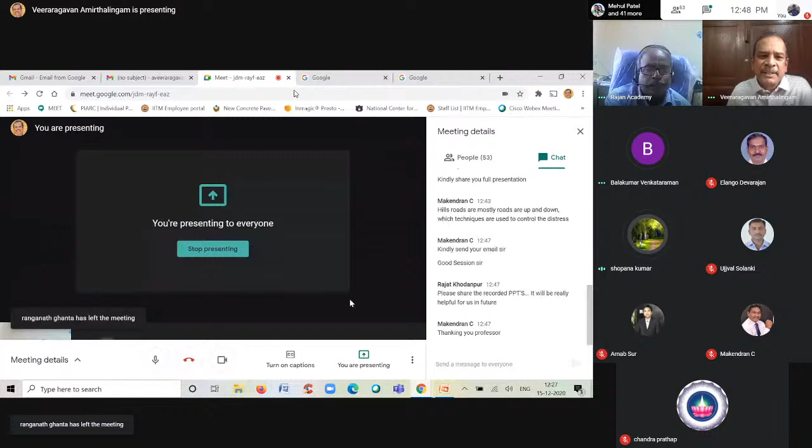We will do it, we will share the recording. We have sent all the presentations, don't worry sir. Somebody has asked for the PPTs - I have answered, Rajan sir. Sure, thank you sir. Thanks a lot, sir. Thank you very much, sir. Thank you, have a great day. Thank you, sir. Bye, bye sir. Bye.